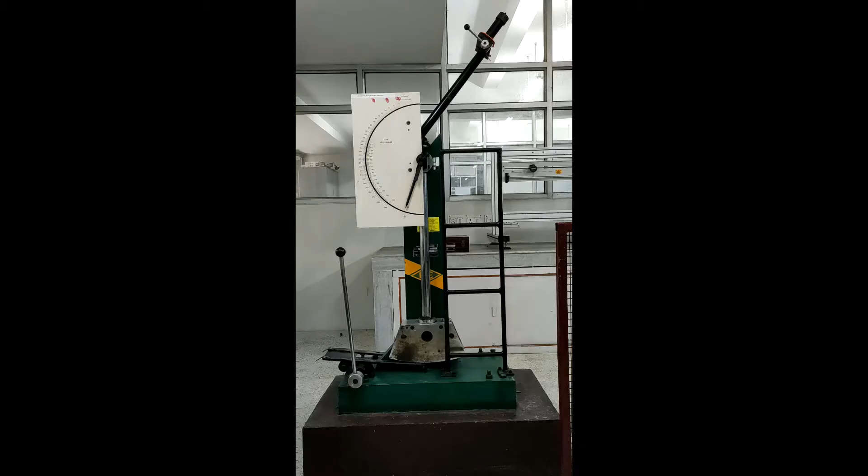Today we are going to perform one more experiment using the impact testing machine. It is a pendulum impact testing machine, and the experiment is called the Charpy and Izod impact test. First we perform the Charpy impact test, and next we will perform the Izod impact test. So let's see the machine and the experimental manual, which we call the lab sheet.

So let's go to the machine. This is the machine.

In this machine you have seen the dial indicator and the pointer. Here, for Charpy, the outer scribe scale is the Charpy impact test scale, and the inside scribe scale is the Izod scale values. In Izod impact test, 1 division equals 2 joule, and this is the pointer. For Charpy also, 1 division equals 2 joule. For Charpy, full scale is 300 joule, and for Izod, 168 joule.

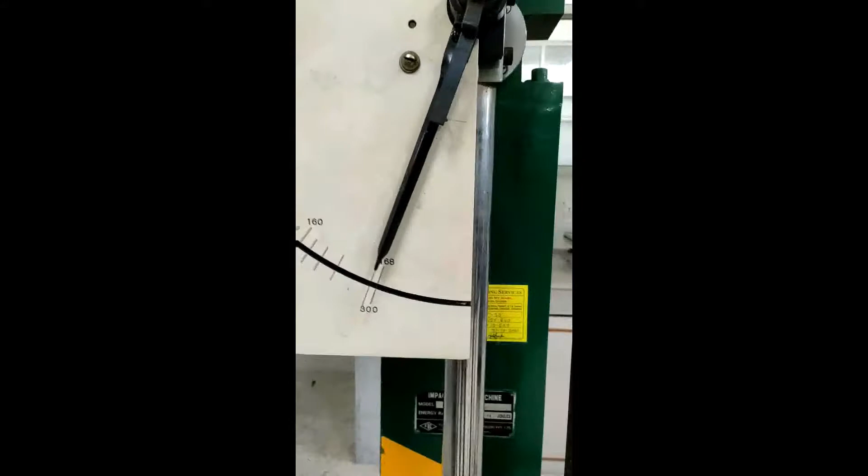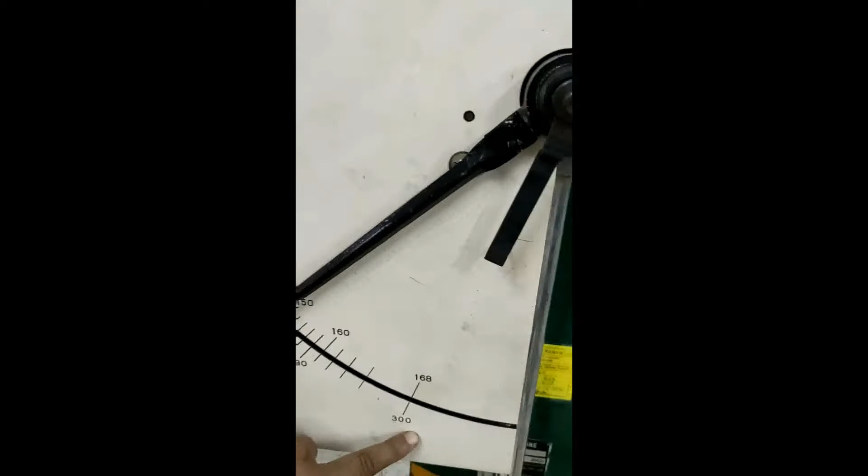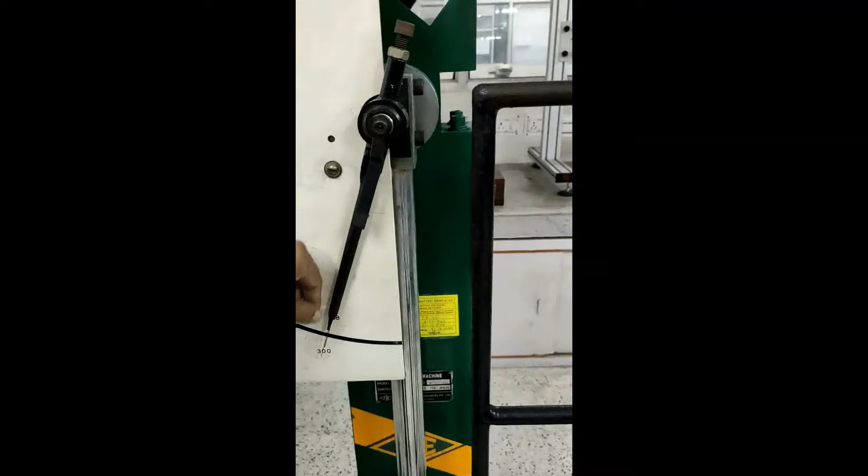This outside scribe scale is for the Charpy impact test, and full scale is 300 joule. For Izod, this scale goes from 0 to 168, full scale is 168, and for Charpy full scale is 300.

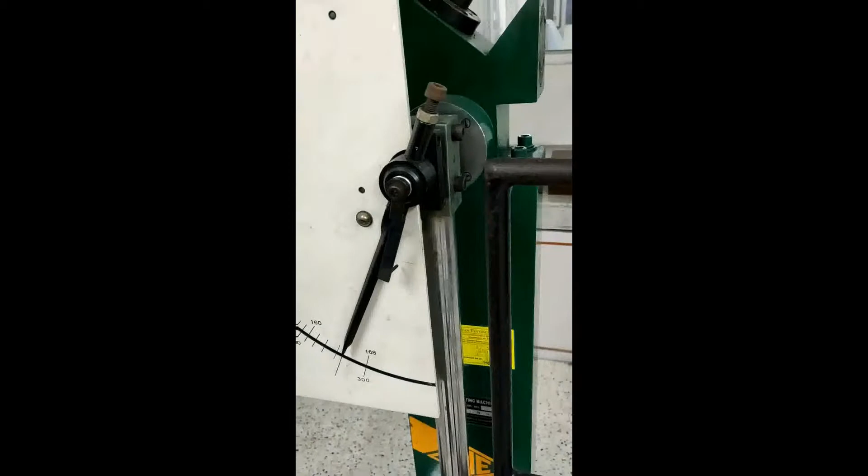So this is the machine, the impact testing machine. This is the latching tube. This tube and the center axis of this impact testing machine, where we place our specimen, that axis angle is 141 degrees, 44 minutes, 14 seconds. And this is the brake.

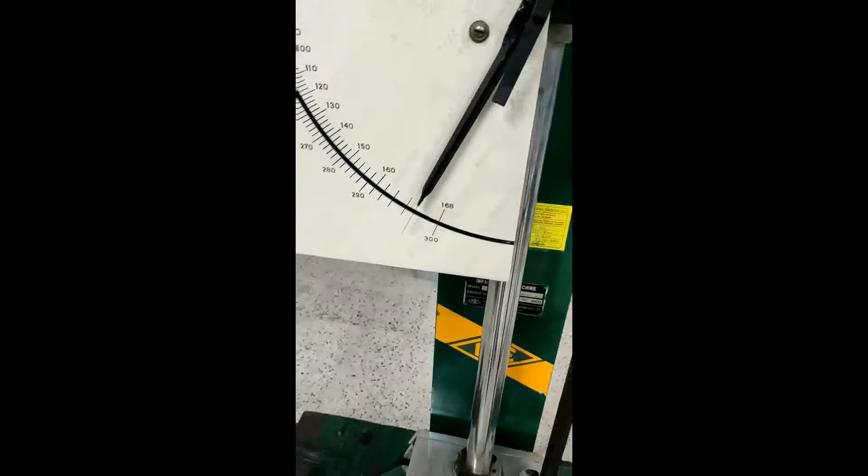Actually this works under the principle of potential energy stored inside the hammer. Once you release the hammer, potential energy will be converted to kinetic energy, and that kinetic energy will be used for breaking the specimen.

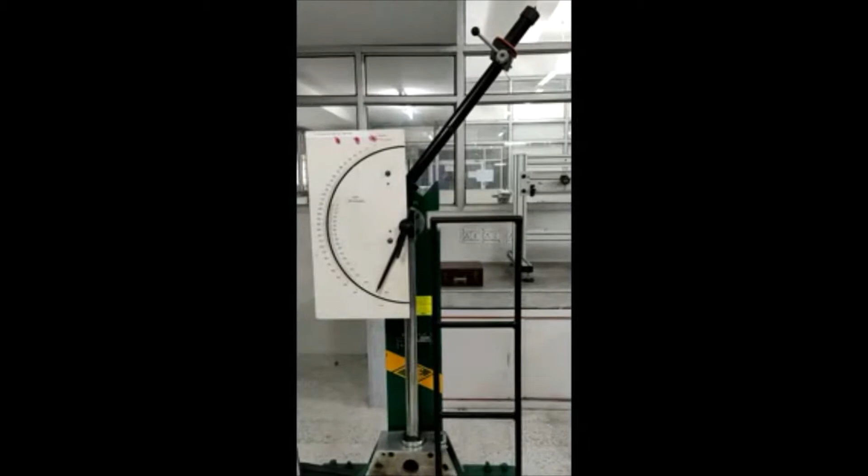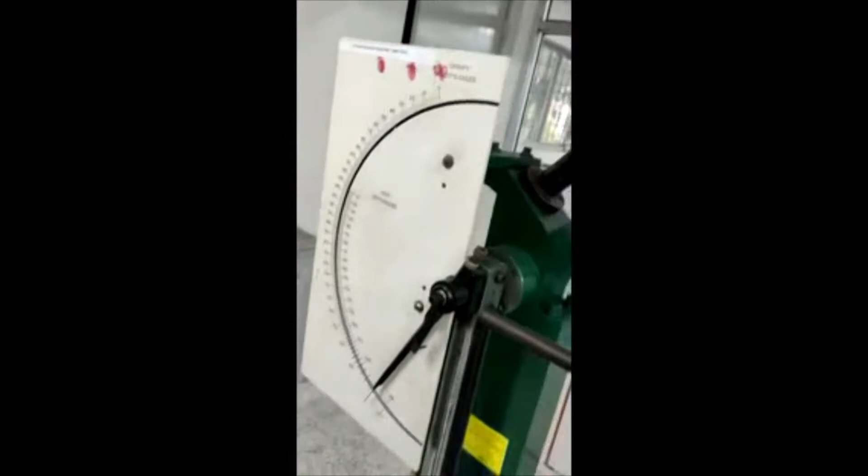Let's see. First, the hammer is now in rest position, stable position. Now we will put the hammer in this position. We will bring the hammer to the top position and fix it at the top.

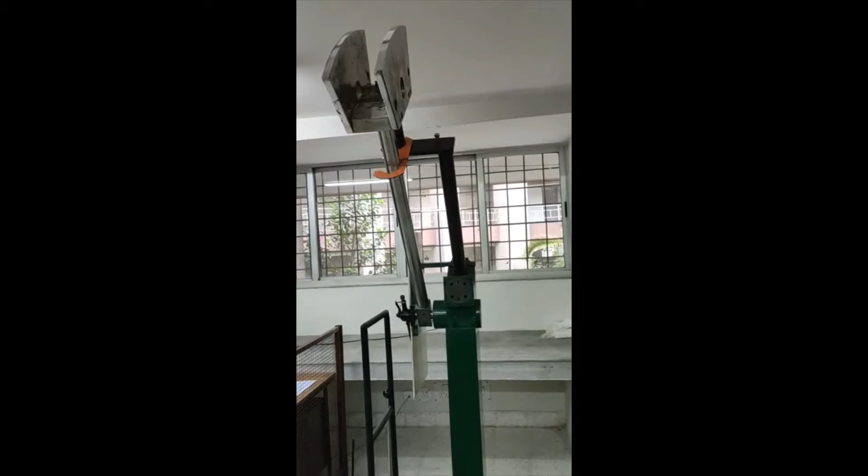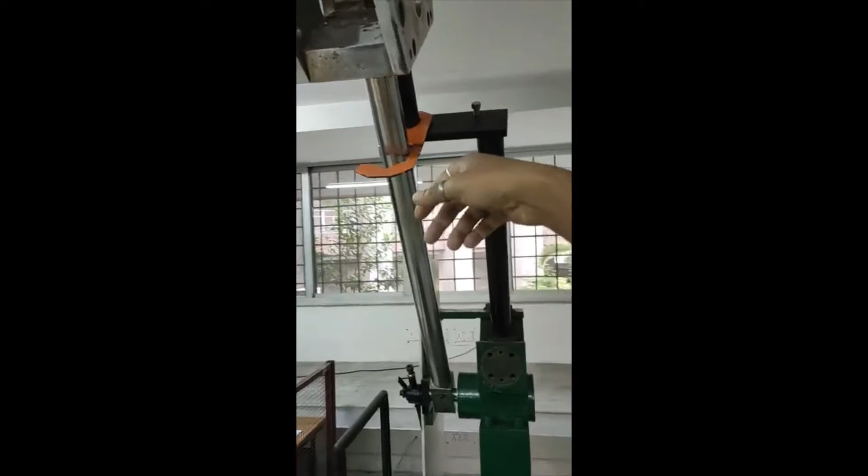So how am I making it? You just check once. I am bringing this hammer. I put the hammer in the topmost position by lifting it, and once I put it here, automatically it will keep fixed. This is the safety handle. Now the hammer is in the topmost position. Now this machine is ready for conducting the Charpy impact test.

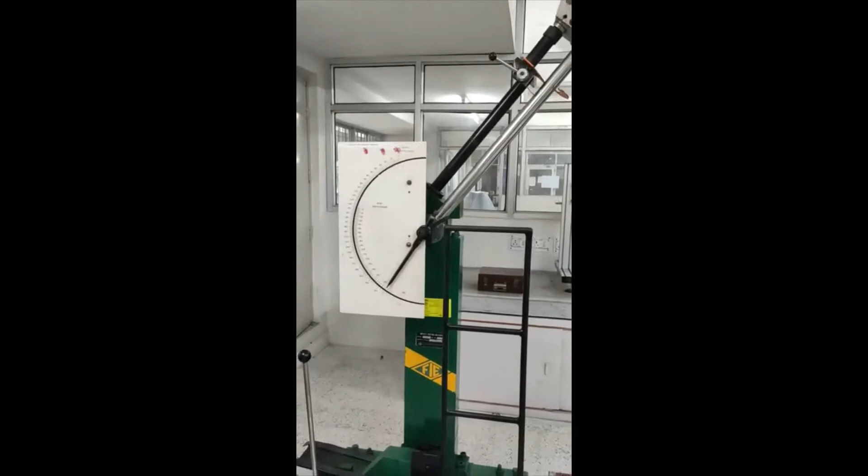So how to perform the Charpy impact test? This is the first step. Second step, we will put the specimen.

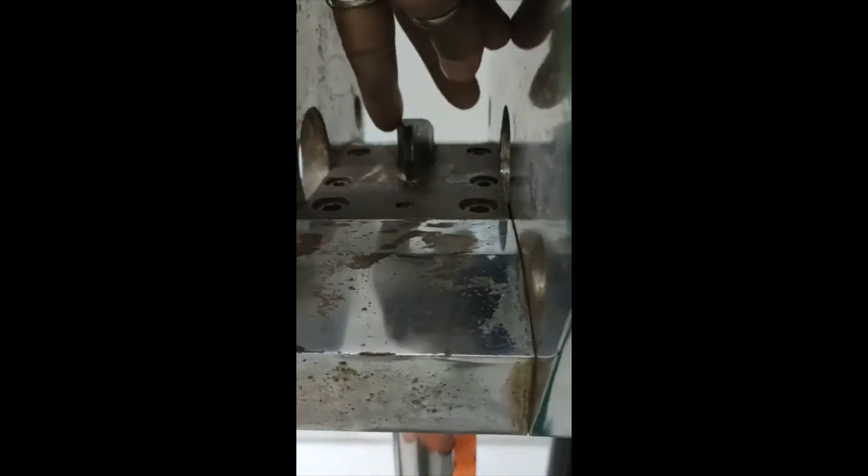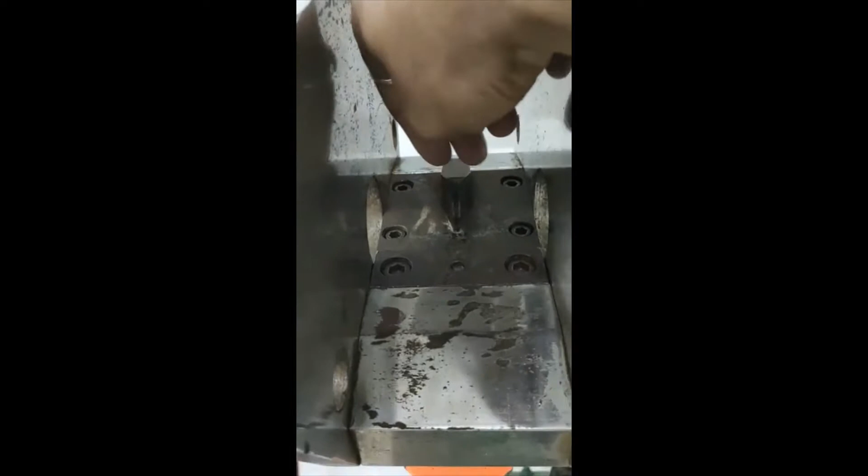Before putting the specimen, you need to see some other things. This is called the striker. This is tapered, a pointed striker. Both sides are tapered. The striker can be taken out. For the Charpy impact test, this is the striker. For the Izod impact test, the striker will be different — that we will also show you. So in this hammer, this striker is attached.

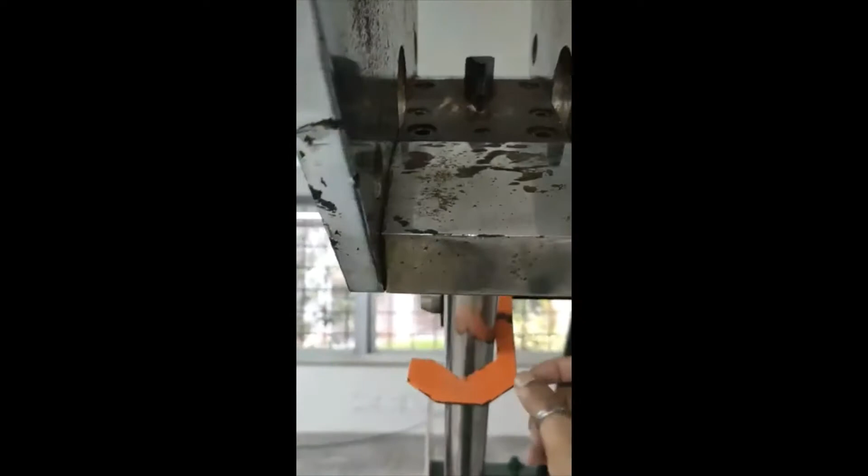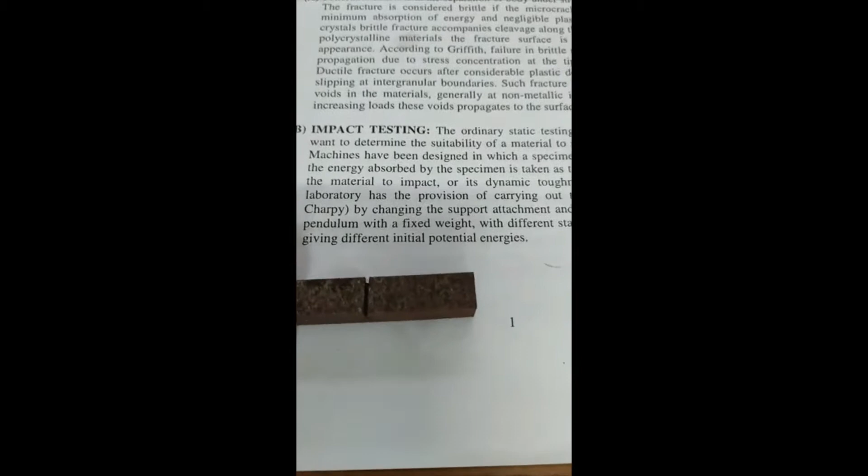Now we can go for fixing the specimen. For fixing the specimen, you need to go to the bottommost position of the setup. So this is your specimen. Just check once — this is the specimen. There is some rusting because these specimens were kept since last year, but this is our specimen.

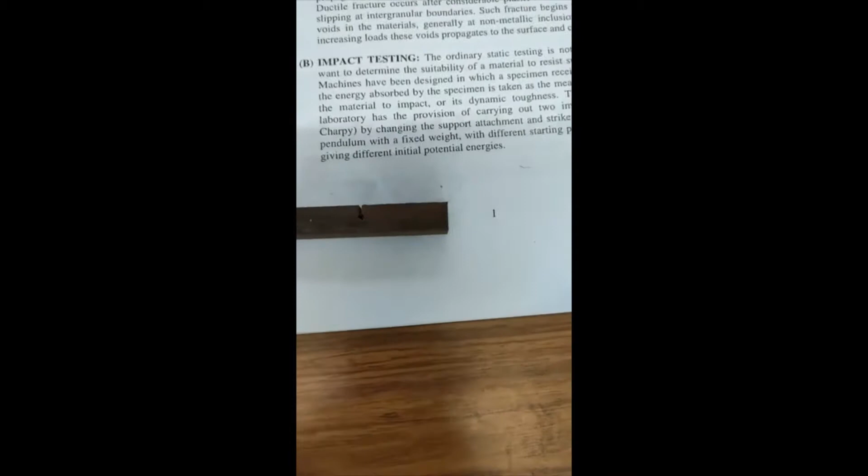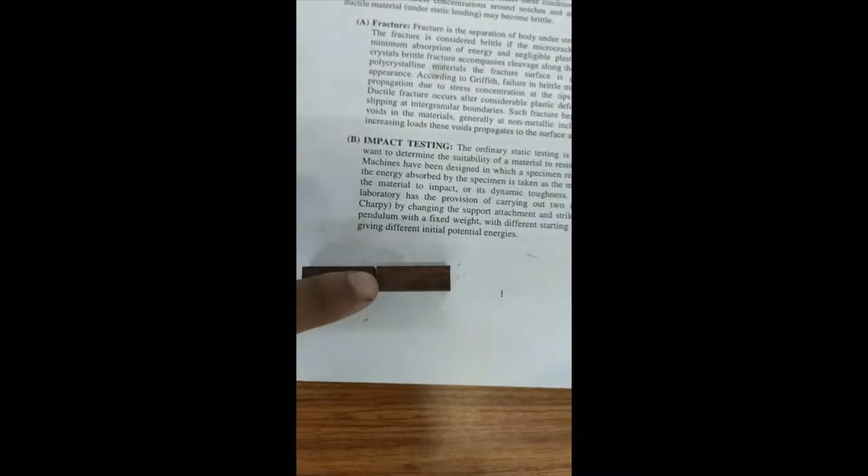Here you have seen, in this specimen, one notch is there in the center. This is the notch, this is called a U-shaped notch, a U notch. In Charpy and Izod impact tests, there will be a notch on each specimen.

For the Izod specimen, this is the notch. For the Charpy specimen, this is the notch. The notch can be either a U notch or a V notch. So the notch geometry, where to put the notch, and the specimen geometry are all specified here.

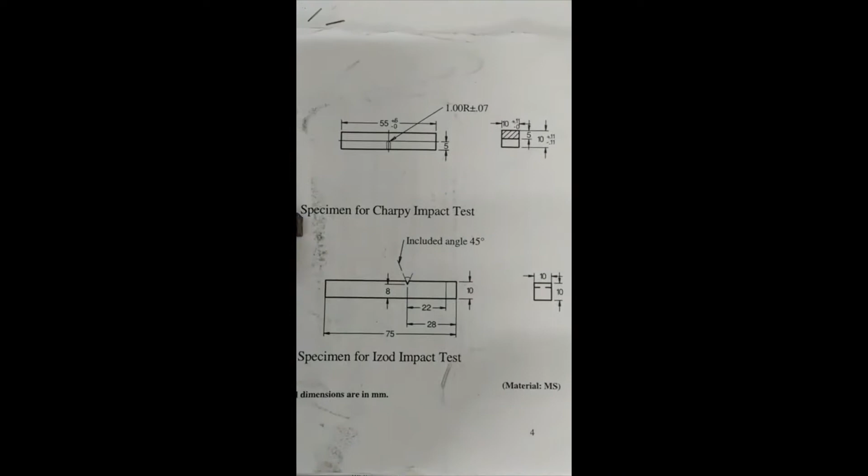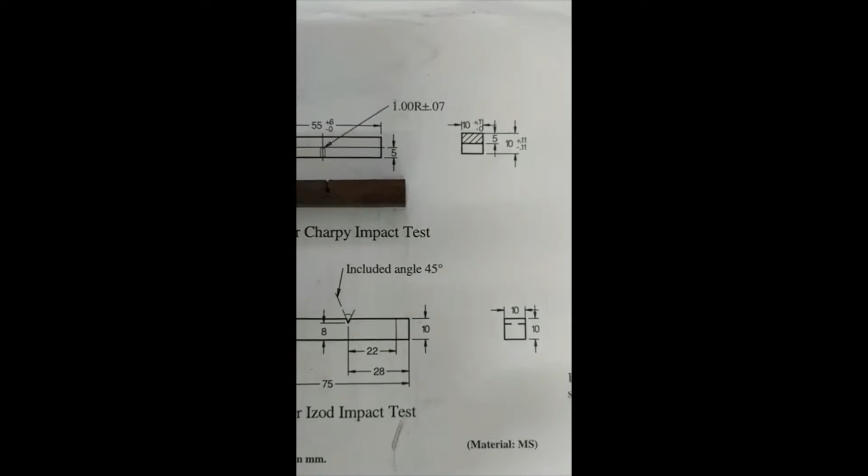This is the specimen geometry. For Charpy, the specimen length is 55 plus minus 0.6 mm, and the notch geometry has a 1 mm root radius plus minus 0.07. This notch should be made using a milling cutting machine. The width and thickness of this specimen is 10 mm by 10 mm, length 55, and the notch geometry is as shown.

This one is the notch geometry. You can see it clearly mentioned here.

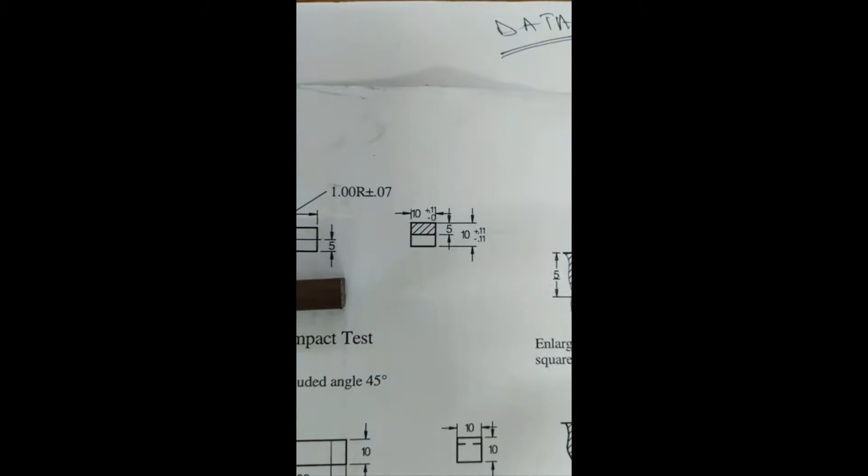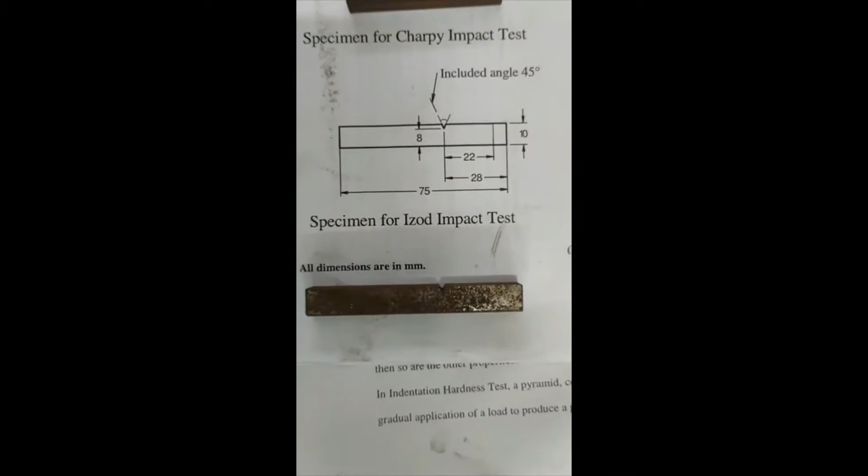This is the notch, for Izod. This is the specimen, and these are the specimen dimension details and notch geometry, with an angle of 45 degrees.

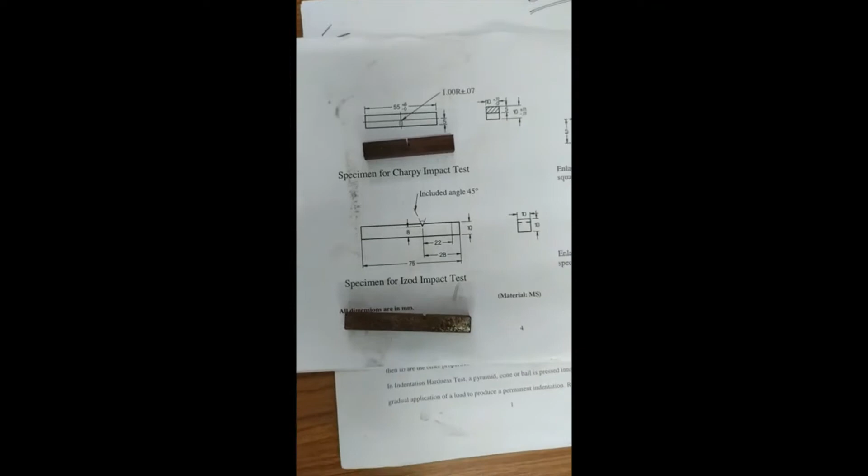This is the geometry. Root radius for Izod is 0.25, for Charpy is 1 plus minus 0.07 mm. Everything will be given as soft copy and video, and we will provide a manual copy so you can easily understand.

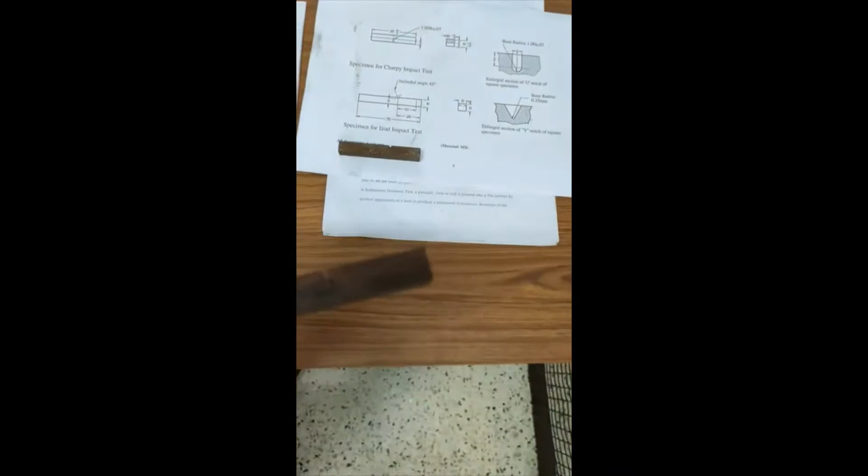Now this specimen we will put on our impact testing machine for Charpy impact test. First we will perform the Charpy impact test.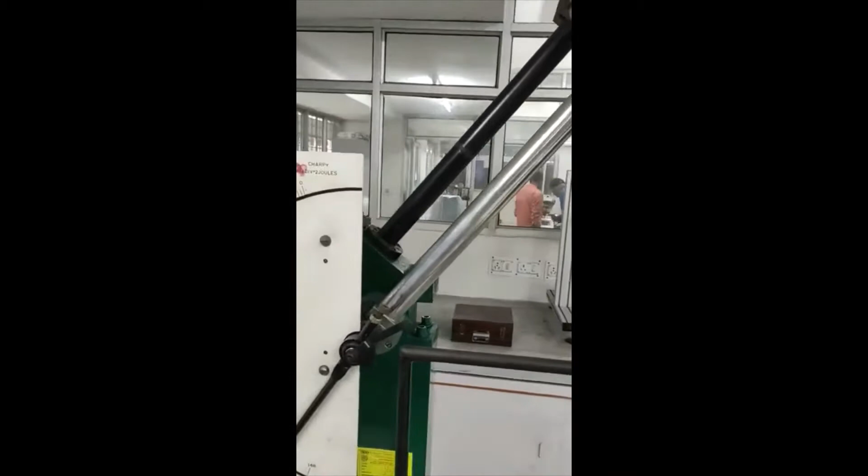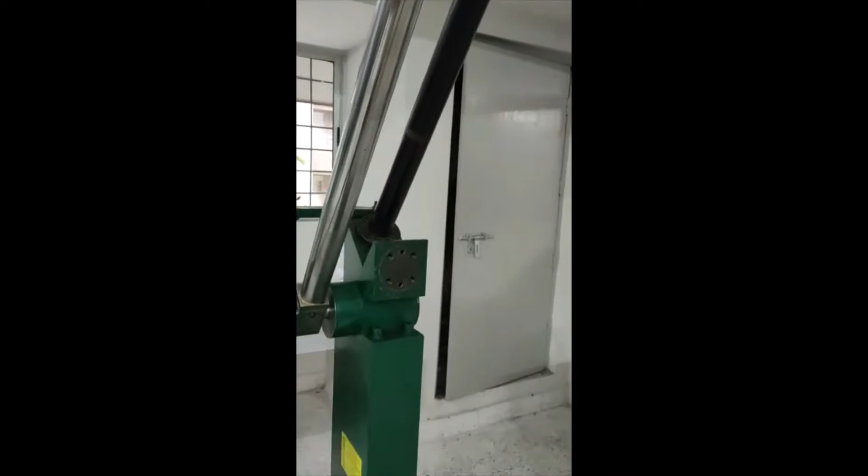The machine is ready for Charpy impact test. For Izod impact test, we need to change the hammer position. Now the hammer position is 141 degrees, 44 minutes, 14 seconds, as I told earlier. But for Izod, we need to change this hammer position to almost 90 degrees. For that, this tube needs to be fixed here, then the hammer will be positioned horizontally instead of angular. We also need to change the striker for Izod.

The machine is ready for the Izod impact test, we will perform it right now. How to perform the Charpy impact test I have already explained.

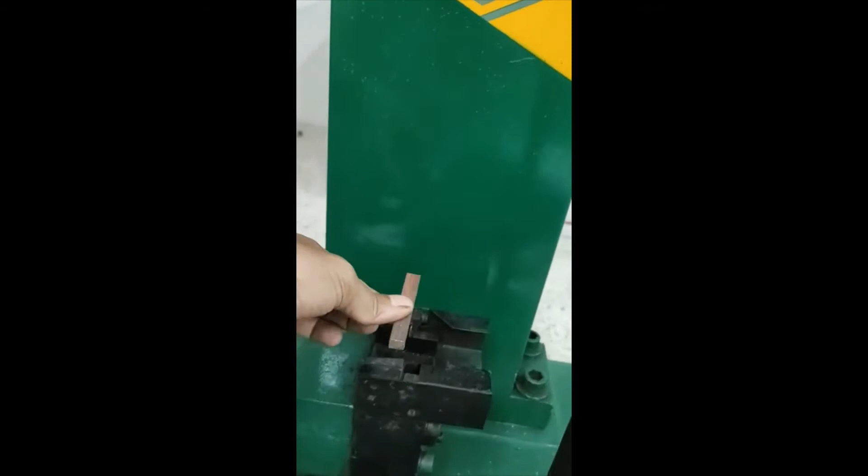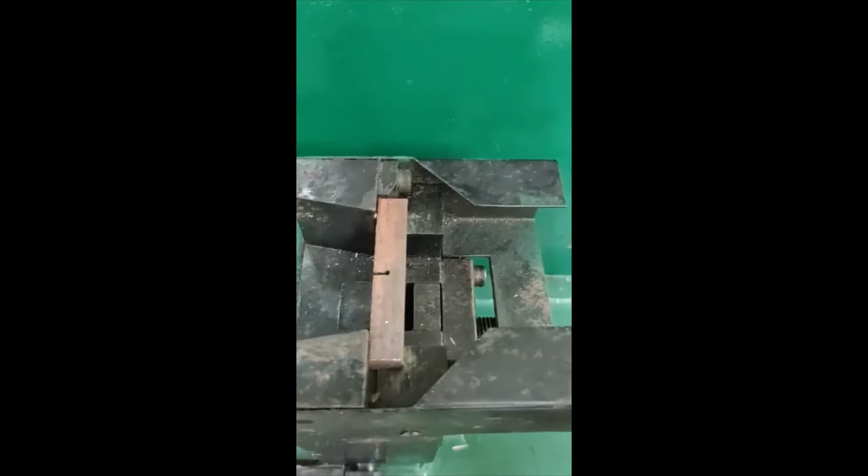Now we will fix the specimen. We will hold it like this, and the striker will strike exactly at the back of the notch. We put the specimen like this, with the notch facing the frontward direction, and the striker will directly strike exactly behind this notch.

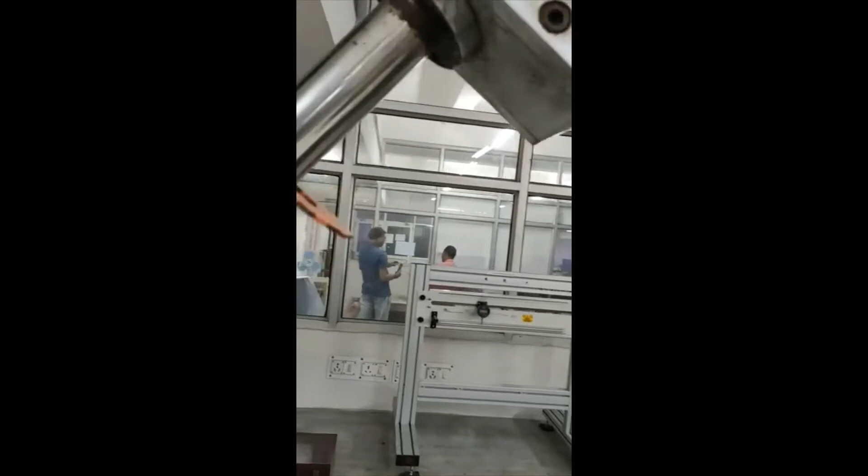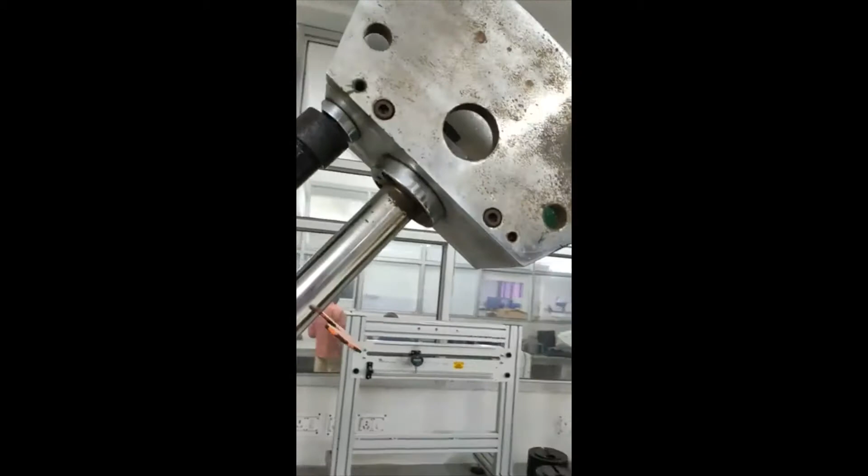Now we will release the hammer. The weight of the hammer is around 21.5 kg, and we know the height too. This hammer has potential energy stored within it. When we release it, this potential energy converts to kinetic energy, which is used for striking the material. Then we find out the toughness of the material, how much energy is absorbed while fracturing or breaking it.

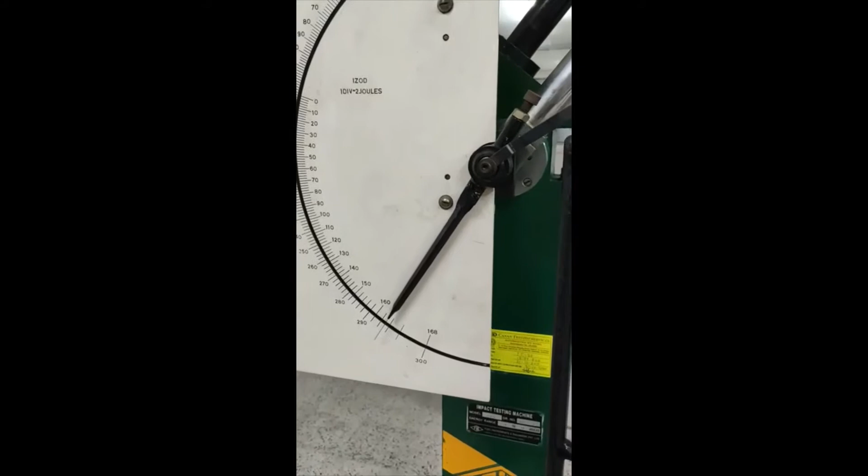Why is the notch provided? So that the specimen breaks through the notch point, otherwise it may not fracture and will just get bent. You will get some idea of how to measure the toughness of material once we perform the test.

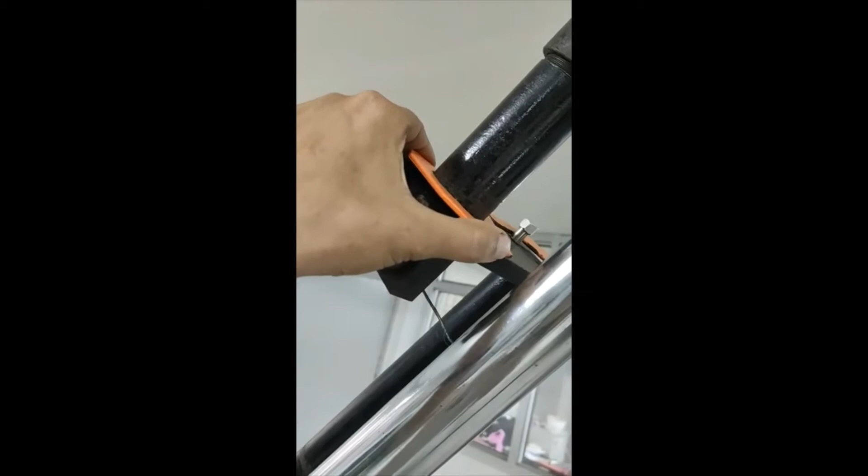Now I am going to release the hammer. For releasing the hammer, you need to place this safety handle in its position. Now the hammer is ready to release. This is the hammer releasing lever. We will release this lever, then the hammer will swing and fall, striking the sample exactly at the back of the notch.

Then the specimen will get two pieces. If it is ductile material, it may just fracture or show some deformation before failure. If it is brittle material, it will completely become two pieces.

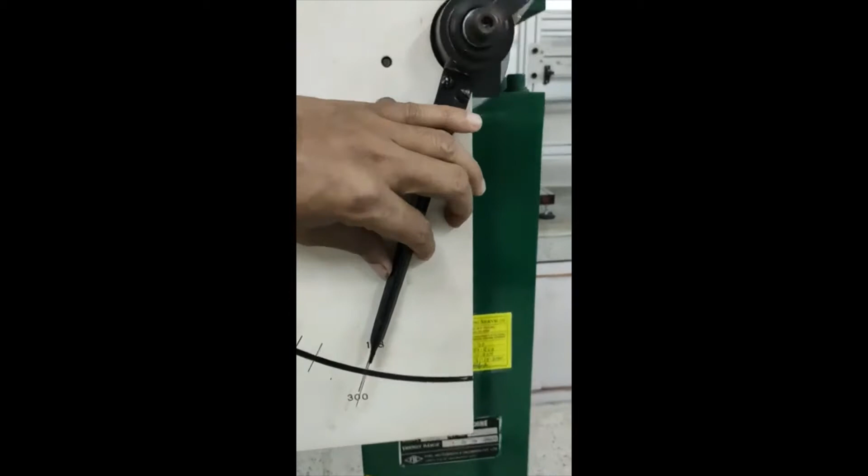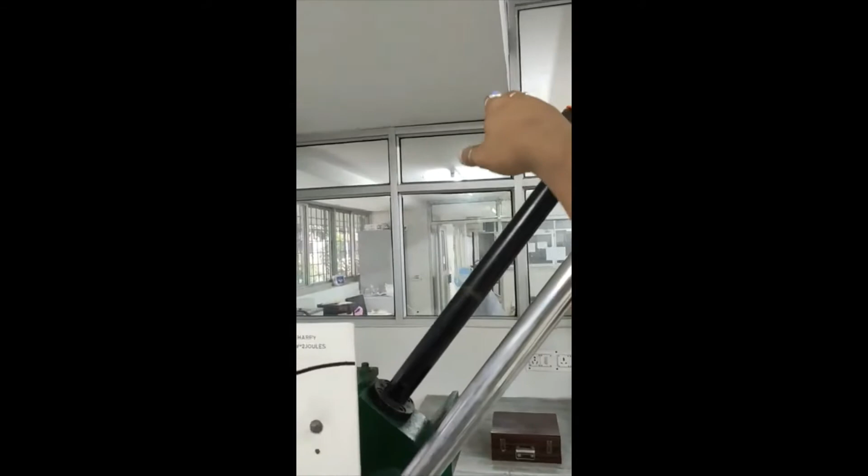Now I will place this pointer here. Okay, now I will release the hammer. I am going to release the hammer. Once I release it, the hammer swings and strikes the material, and the specimen fails.

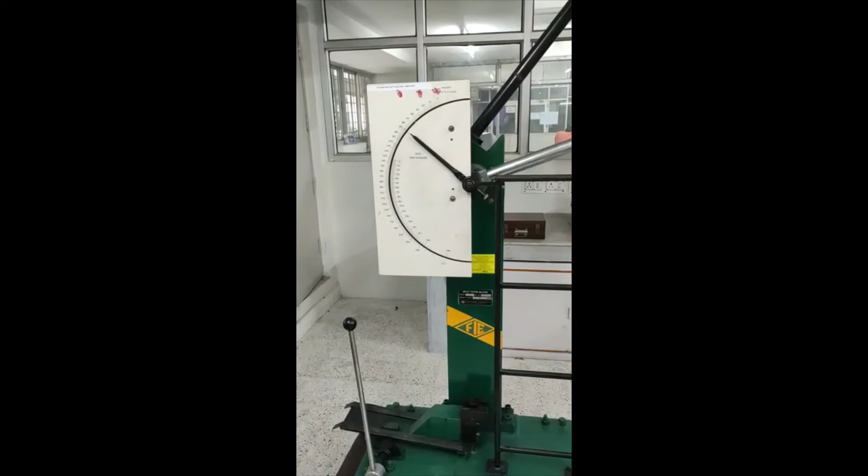The specimen becomes two parts through the notch. Now we need to stop the hammer as it is swinging. Since this experiment is a little dangerous, protective barricades are given, so now we will apply the brake.

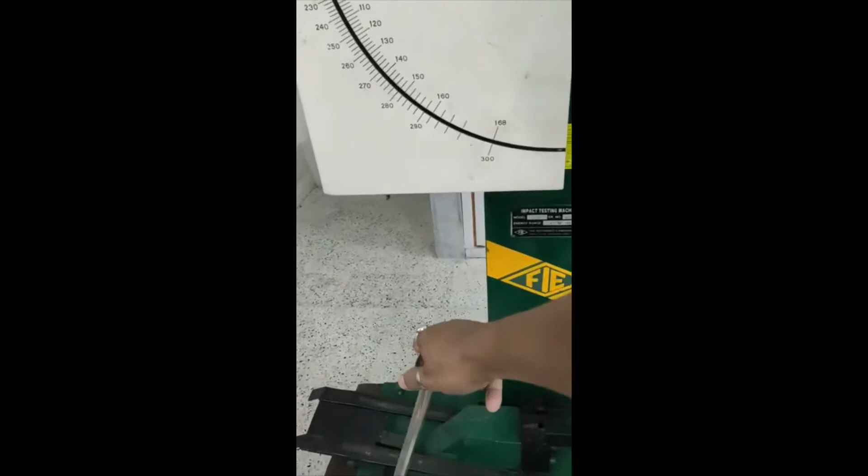This is the brake, we will use this. Then the hammer will be stopped. Hammer is stopped now. We will measure how much energy it absorbed while fracturing the material.

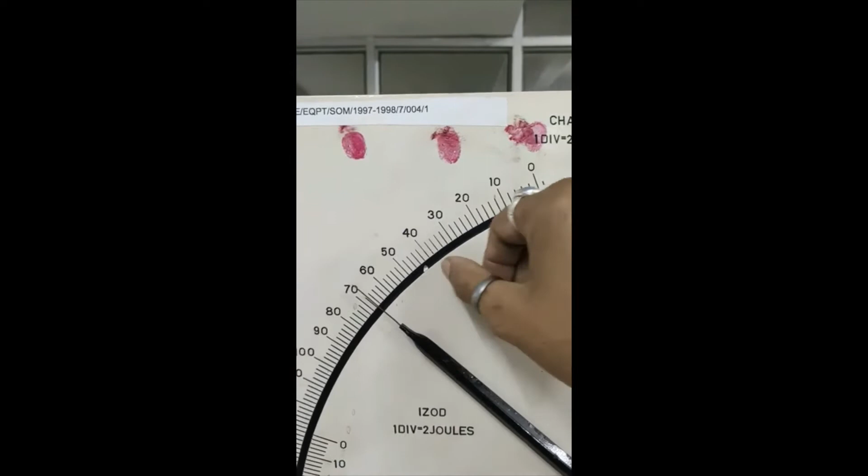You count from 0, with 1 division equal to 2 joules. This is 2 joules, 1 division is 2 joules: 4, 6, 8, 10 joules, this one is 10 joules. Here you can read it directly: this is 60 joules, 62, 64, 66 joules. Almost 66 joules of energy was absorbed by this material.

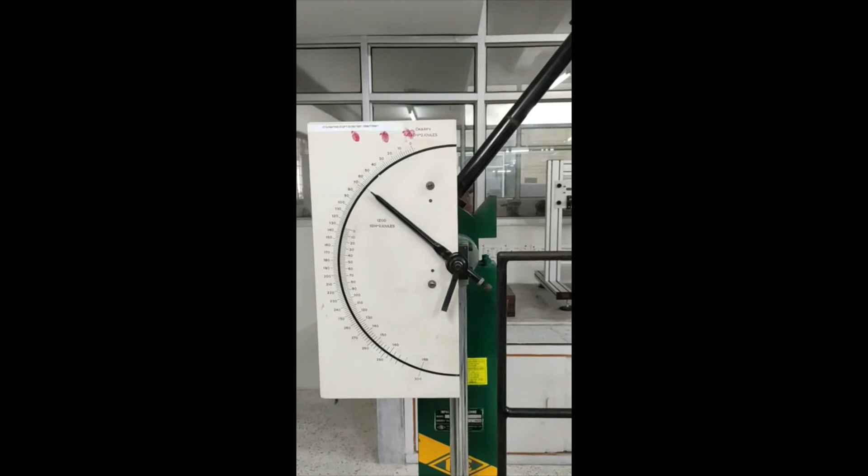This is how we perform the Charpy impact test, under different conditions like temperature and weather. In cold conditions, if we keep the material at low temperature below a certain degree Celsius, will the toughness change or not? At high temperature it may take more load, and at low temperature it may take less load. So at different conditions we can perform the test.

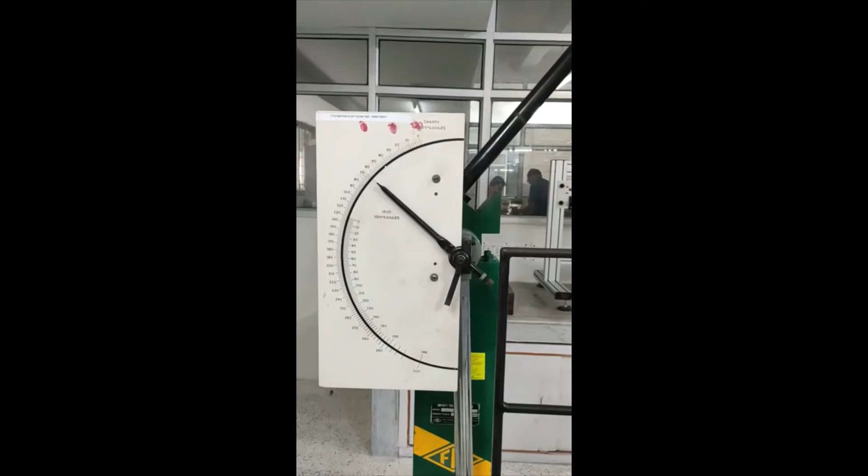We performed this test at normal room temperature, but this machine doesn't have a specific environment or temperature chamber available, so we had to perform it at normal room temperature only. So thank you all, thank you very much.

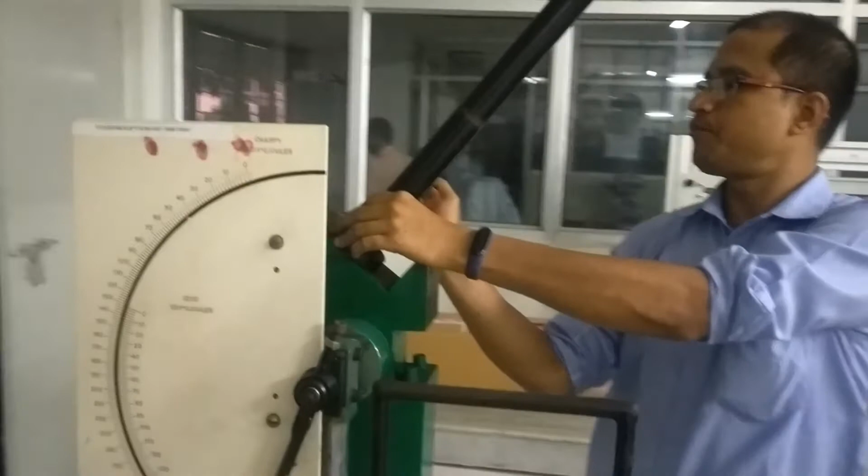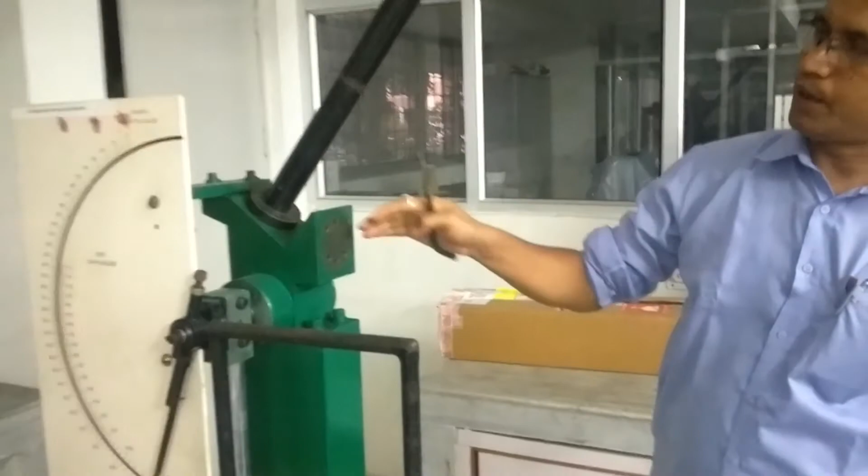Next I will show you the Izod impact test. Since we already performed the Charpy impact test, now for this configuration we need to place this tube at a different position to change the impact energy, to an angle of around 90 degrees. We need to loosen these Allen screws and take these things out, then only we can proceed.

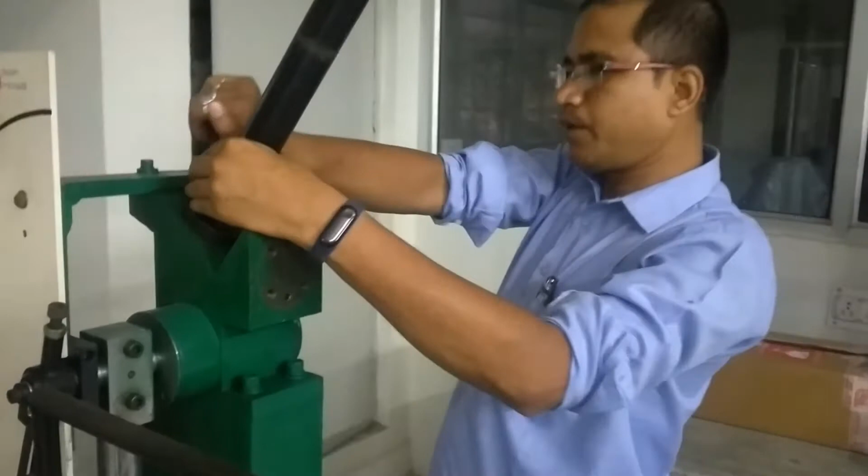Now we will remove this tube and insert it here. After putting it in place, we need to fix these Allen screws and tighten them.

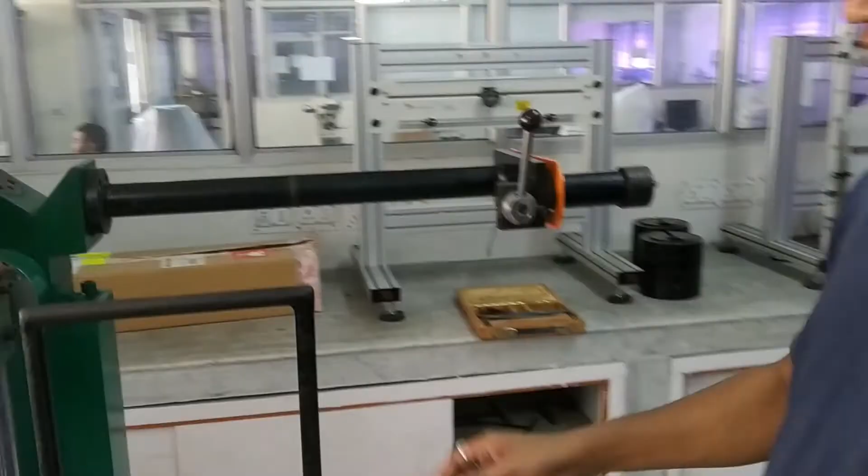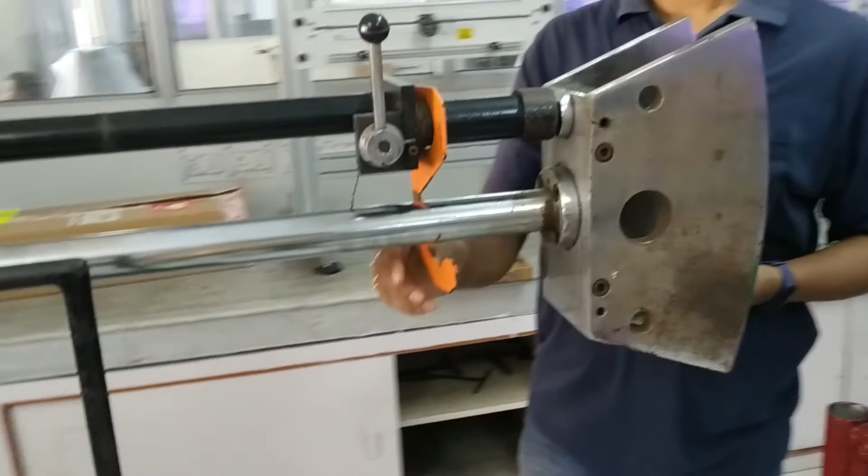Impact testing machine is ready for the Izod impact test. This is the hammer, the swinging hammer. We will place this hammer in this position. After that, we will put this safety handle, then we will place this pointer.

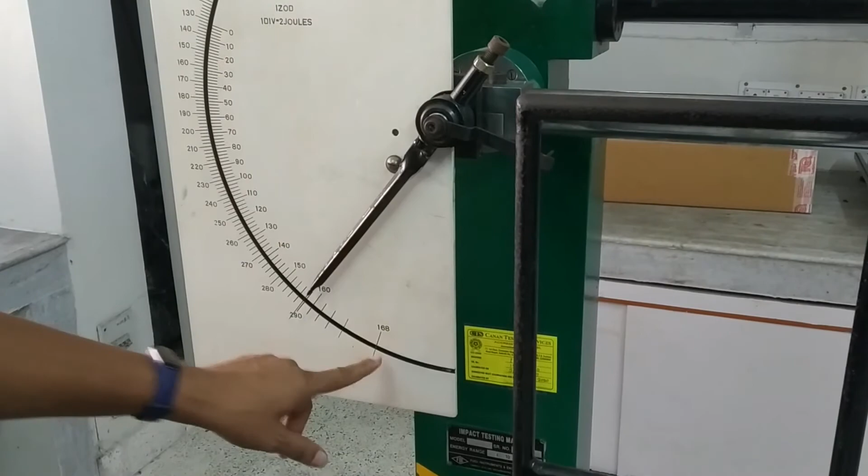Izod full scale is 168 joule, per division equal to 2 joule. The inside scale is the Izod scale, so we will put it here at 160. This pointer we will put here.

Then we will show you the striker. This is called the striker. This striker is different from the Charpy impact test. This is called the Izod impact striker.

This is our specimen, this is our material. This length is 75 mm. This is the specimen, 75 mm, 10 into 10, width and thickness 10 into 10, and this is the notch.

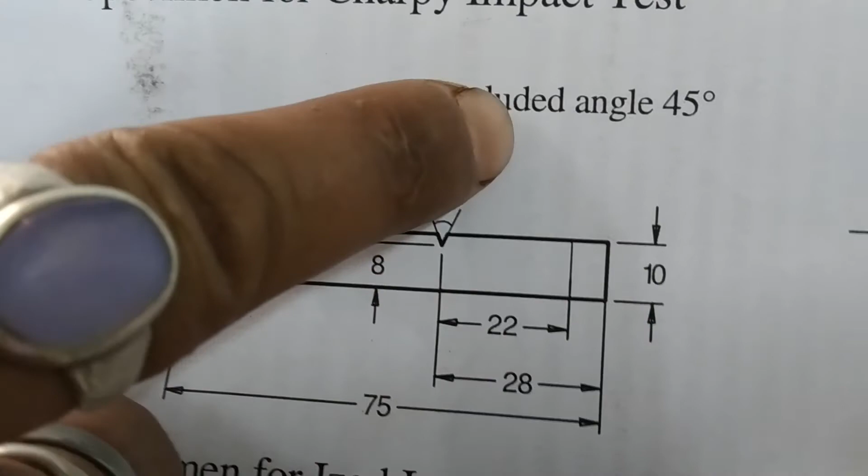This is a V notch, this is the notch geometry. Included angle 45 degrees, depth of this notch 2 mm, and from notch position to the top the length is 28. The striker will strike in front of this notch, 6 mm below from the top. That means 28 minus 22 will be 6 mm below where the striker will strike.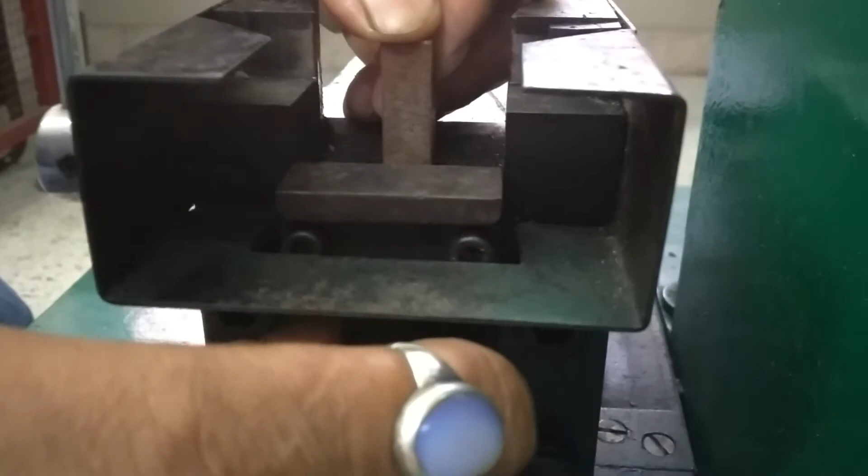Now we will place the specimen in that fixture. This is called the template. We insert it through this notch, the V notch. Then this Allen screw is available here for tightening, for properly holding the specimen in position. Now we will tighten it with this Allen key.

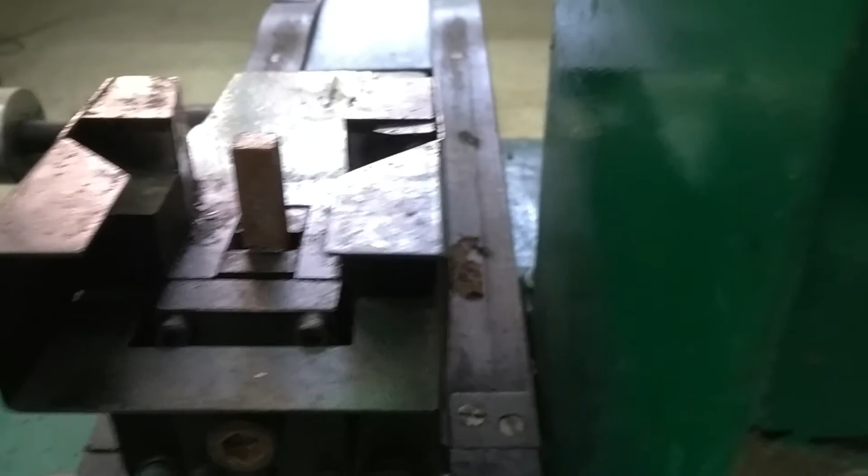After tightening, we will take this template out, and now we will go for striking the specimen with the swinging hammer.

Now let us remove this safety handle. During the sample fixing time, this handle should be kept here, otherwise some accident may happen. That's why we should keep it, and during testing you just take it out or remove it, and then everything is kept ready. This angle position, hammer striker into the sample axis, the angle is 90 degrees.

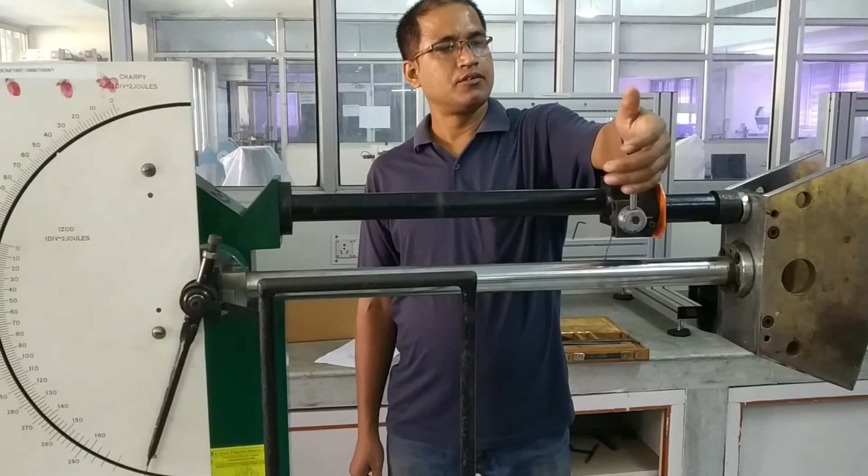Now let us release the hammer. So we will release the hammer.

So now we have seen the hammer impact the specimen, and the specimen gets failed. Specimen broke. So how much energy was absorbed, you can see directly from this dial gauge. The pointer shows very clearly, around 40, 42, 44 joule. 44 joule energy absorbed. Now we will remove the specimen.

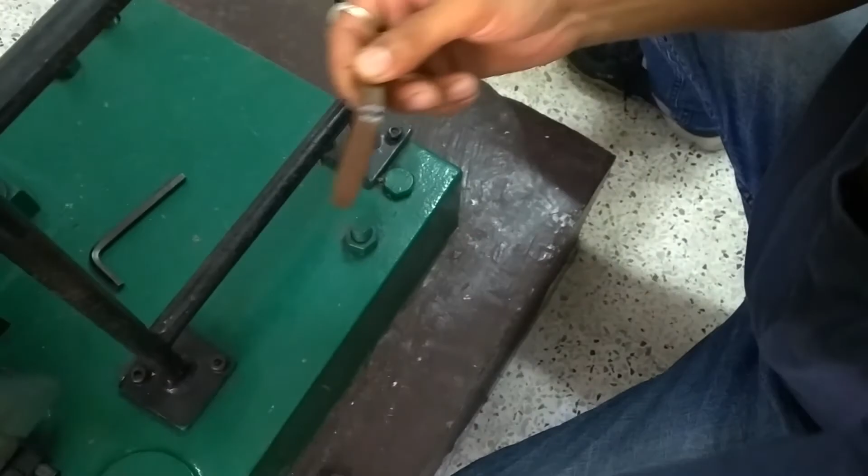For removing the specimen, again you need to loosen this Allen screw with the Allen key, then take out the specimen. So this is the material. It broke at this point.

So now the test is over. The rest of the calculations you need to do. We will provide you a manual here with specimen geometry, all the theory, and these details. Some quiz answers and questions are also there. Then you need to write your answers and calculations.

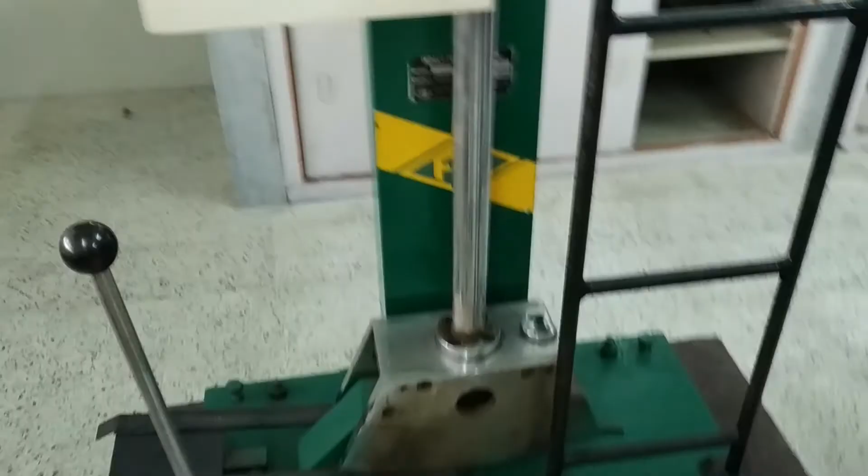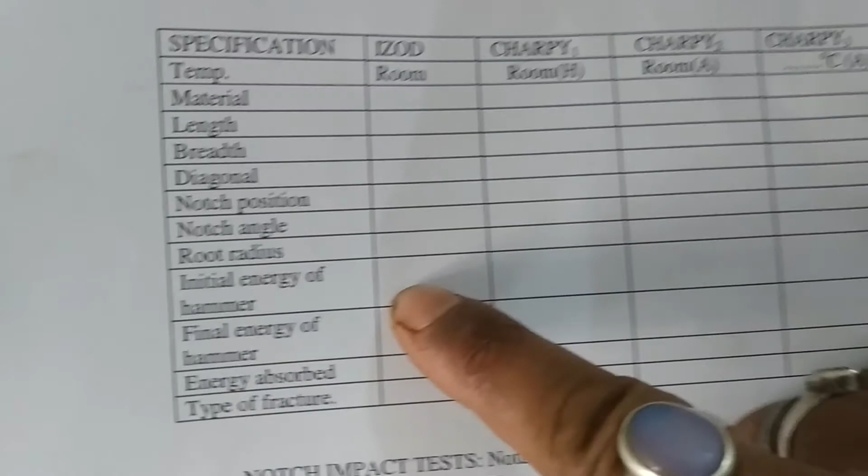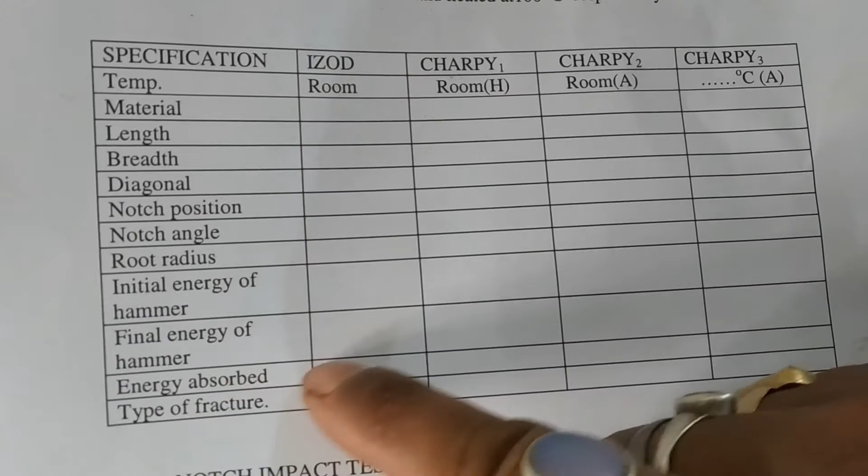Final energy of hammer you will get from this energy absorbed. How much energy absorbed? 44 joule we have got. So initial energy of hammer minus energy absorbed equals final energy of hammer. That you need to write here.

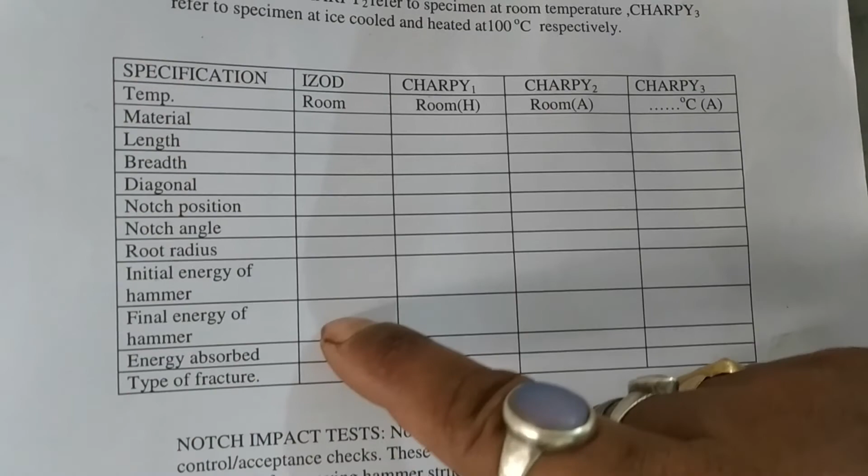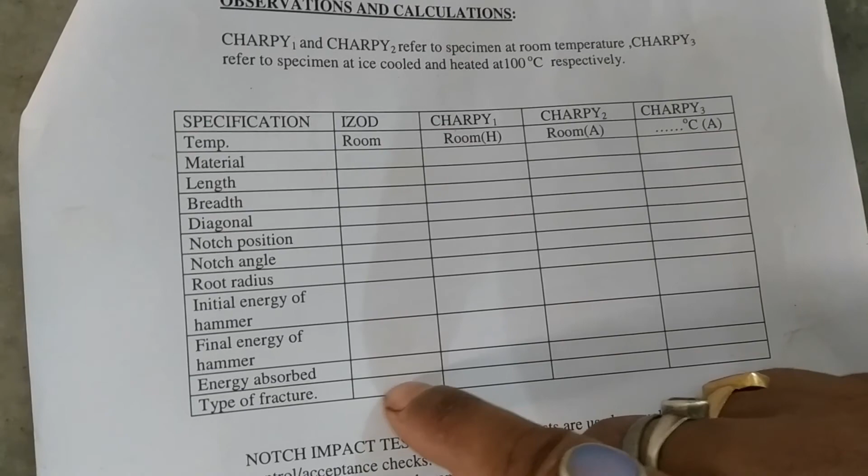And the type of fracture - for studying and getting the type of fracture, you need to look at it through the eye, or you need further study in a microscope. Then only will you actually know what type of fracture happens - ductile fracture, brittle fracture, or some other type. So you can write it as brittle fracture or ductile fracture, depending upon the observation in the microscope.

So this is the experiment. For Charpy also, in this same way, you need to put your readings and do the rest of the calculations.

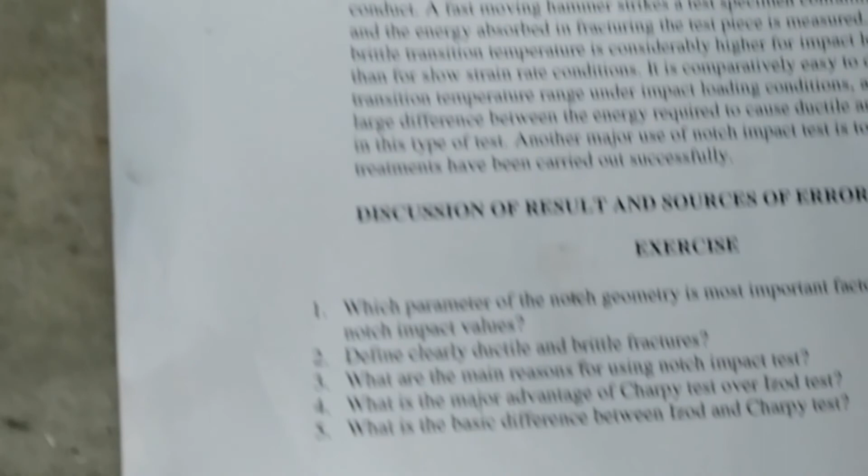These are some questions, exercises. So here you need to answer all those things. Thank you very much.